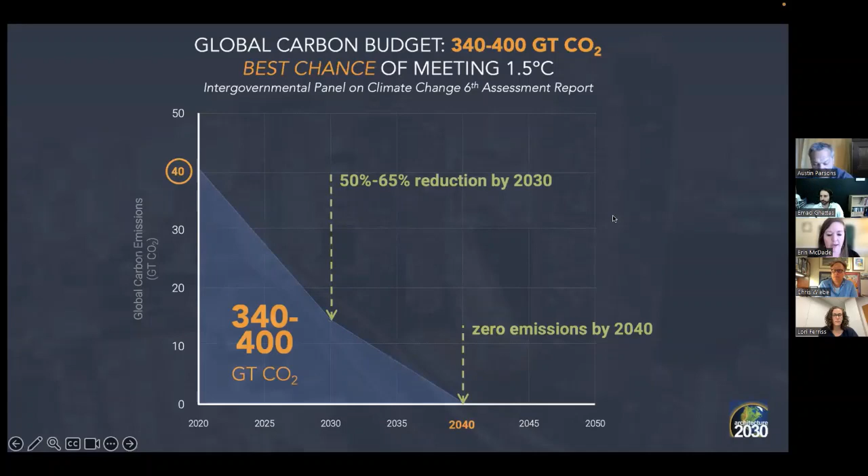And what that really looks like and what Architecture 2030 is calling for is a 50 to 65% reduction in all global emissions by 2030. So that includes the building sector, of course, but everything else, and then zeroing out by 2040. So partly I present all this because for me, when I'm working on C.A.R.E particularly, I'm always keeping in the back of my mind this 0 by 2040 year. So our 0 year is 2040 and everything I'm doing is working to align with that.

So diving a little bit into existing buildings specifically, there is a truism in the architecture and design world, and I'm assuming in the heritage world as well, that the greenest building is one that's already built. And if we do a quick look at what a typical new building's carbon footprint is, we can get a sense of why. So when we're constructing a building, there are a lot of emissions associated with that. There are all the emissions from the material extraction, from transporting these materials, and from actually building the building on site. We call that embodied carbon, and those emissions are in the atmosphere before the building is even occupied and operated, and they stay up there forever.

And so in this case, this average global new building has a decent amount of embodied carbon emissions. And again, once they're up there, they're always up there. And then starting on day one of a building's occupation, there are operational emissions, and those operational emissions start smaller and they build up cumulatively. And similarly, once they're up there, they're up there. Of course, with operational emissions, we can always retrofit and we can reduce those. With embodied carbon, no chance.

So if we're looking at this typical new building and we're drawing a line in the sand at our 0 year of 2040, we see that even though those operational carbon emissions are rising and cumulative in this example, we still have almost 60% of the total emissions pie for this building being embodied carbon. And when we reuse existing buildings, this green piece, this embodied carbon, is significantly reduced, which is what we'll talk about in more detail with the C.A.R.E tool.

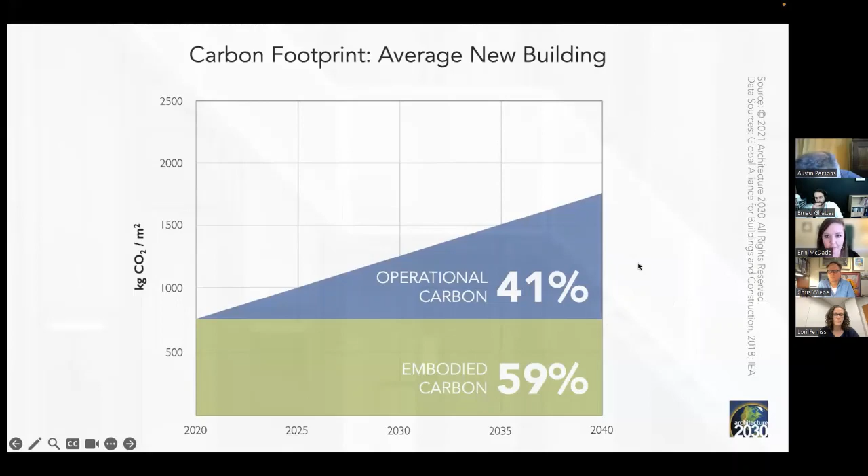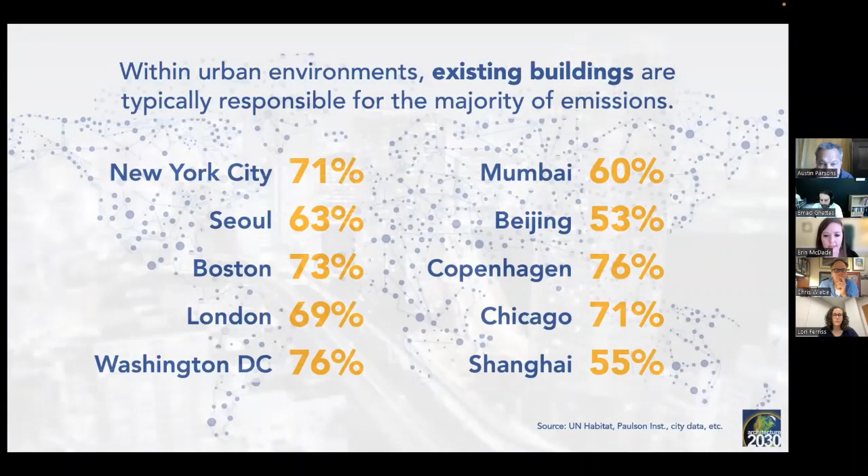But we can see because of this, that if we are able to save the majority of these green emissions, and we're able to curve down our operational emissions, then of course, reusing an existing building in this case is going to be smarter. But since we do have those blue emissions, those operational emissions that we haven't always gotten down to zero, what we see from a bigger picture context is that in urban environments, especially urban environments across the world with a significantly developed and older building stock, existing buildings represent the majority of total emissions for those entire cities. And you can see examples of that from a large variety of cities in different climate zones and regions. So obviously addressing existing buildings is pretty critical.

And if we scale that all the way up to a global perspective, what all of the estimates show us is that 2/3 of the buildings that will exist in 2040 will be buildings that exist today. So what that means is that most of the buildings that we see when we look around today are still going to be here in our 0 year. And if we have not touched those in terms of operational emissions reductions, they're still going to be emitting a significant amount of carbon, arguably the majority of the carbon in the world. And so we will never achieve climate targets if we don't reduce those existing building operational emissions.

So I would posit that instead of the greenest building being one that's already built, the greenest building is one that's been retrofitted. And that is really, at a high level, the genesis of the C.A.R.E tool.

And Chris already did a great job of a high level intro of the C.A.R.E team, but I just want to quickly do a little introduction, especially of our team member, Larry Strain, who can't be here today. He is the founding principal at Siegel Strain Architects. They're a firm out of the Bay Area in California, and they do a lot of reuse work.

And then, of course, my colleague, Lori Ferriss, who you will hear from later. She's the principal director of sustainability at Goody Clancy, which is out of Boston, and they do a lot of preservation, especially historic preservation work. So she will be a fantastic person to have this conversation with today.

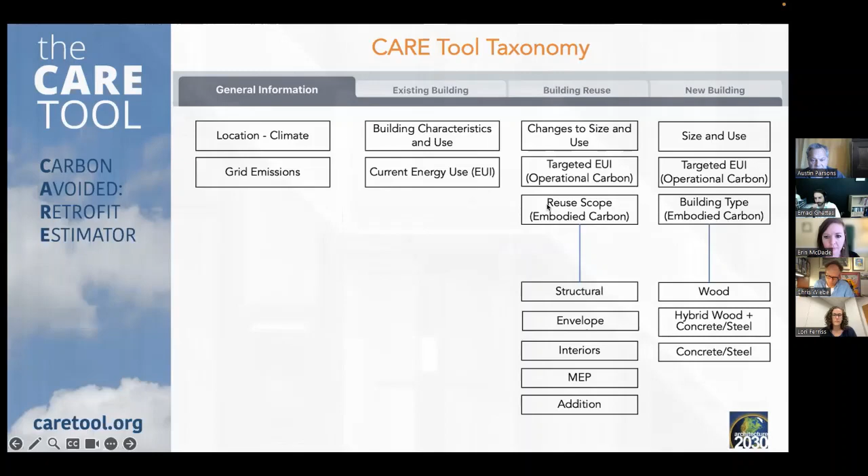And then similarly, you get to the new building tab, considerations about operational energy and emissions for if you replace this new building, and a couple even higher level questions about what that new building might look like from a structural perspective that affect embodied carbon. And I am not going to go through the details right this moment of all of what that looks like and how those inputs work, because we are going to get some case study examples of that from Lori.

And then as Chris said, I'm actually going to do a quick live demo so you can all get a sense of how easy and fast it is to get some results out of this. But so you're prepared for what the results should look like: once you have entered enough information on those 4 tabs, there are a couple of charts that will appear. There's also a data table that will show all the results.

And the first chart, this bar chart, is a snapshot in time of the total embodied and operational emissions for each of those 3 scenarios. The do nothing scenario, where you just leave that existing building and don't touch it. The reuse and addition scenario, or the new construction, the new replacement scenario.

And I think an important part of this, and at least for me when building the whole CARE tool, is that on the very first tab, we'll see it, you get to enter how many years you want the tool to look at for your building. And so I talked again about that 0 year 2040 and doing everything through that lens. So when I'm running through the CARE tool, I'm almost always at this point inputting 17 years there, because I want to look at what this is going to look like in 2040.

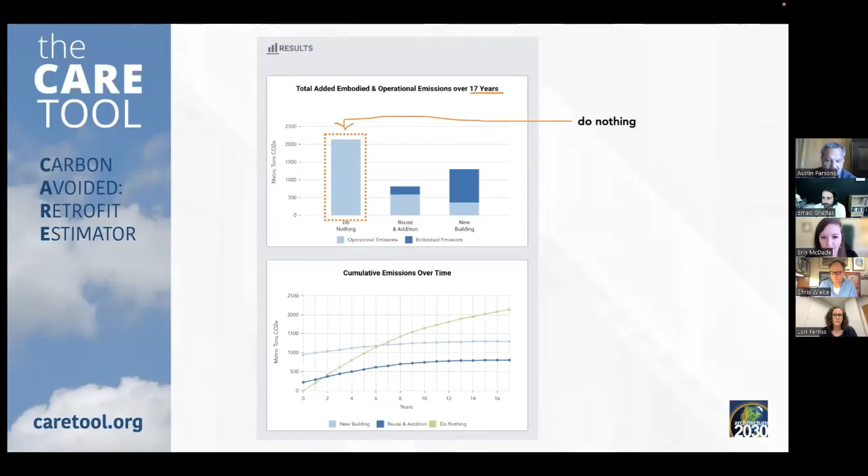But of course it's dynamic, and you can change that as you're entering information and see how more or less time impacts the distribution of these charts, which is pretty interesting. So like I said, the first bar on here is the do nothing bar, and we can see that this light blue is operational emissions, this dark blue is embodied emissions. If you don't touch the building, there are not going to be any additional embodied emissions. You've already built it. Those are already up in the atmosphere. And it'll continue to emit operational emissions for this 17-year period in this case.

And then we can see for the retrofitted building, the light blue, the operational emissions are dramatically less than the do nothing building. So I can already tell that for this example, the building achieved significant energy efficiency improvements, so operational emissions reductions, but that came at a bit of an embodied carbon cost, which you can see right here. Here's the embodied penalty, if you will, for achieving those emissions reductions, as well as any of the other retrofits and upgrades to the building that were necessary.

And then if we look at the new building, we see that it's even better in terms of its operational performance. It didn't quite get down to 0 operational emissions. But because the entire building needed to be replaced, we couldn't save any of the structure, any of the envelope, et cetera, as we presumably did here. The embodied carbon penalty, again, for achieving this dramatic reduction in operational emissions and any other additions and changes to the building that were required, is pretty high.

And so in this case, for this example, I would say, okay, seems pretty clear to me that for our 0 year, the reuse and addition is going to be our best bet. And in an ideal world, I would take this now to another tool that is more granular, and I'd say, okay, what can I do to even get this blue operational emissions box down even farther without adding too much to the embodied carbon box? And hopefully we'll get to the point where we have an optimized reuse project.

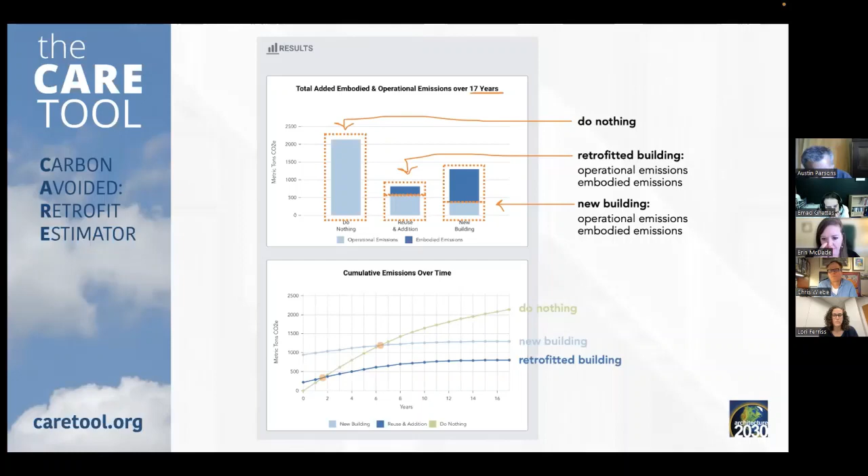And I'm almost ready to pass this now to Lori, so you can get some insights on what this looks like in real world projects. But I know one thing that's important. We have been able to present this tool to different groups outside of the United States. And currently the tool only has data in it, particularly climate data, although the embodied carbon data is regional too, and we'll talk a bit more about that later, from United States data sources.

That being said, there are a couple of short-term workarounds that I've developed so that you all do not need to wait to use the C.A.R.E tool right now. But then long-term, again, I want to be clear, we have plans to regionalize the tool as much as absolutely possible so that it actually has data from each of your individual countries.

So quickly, the first workaround is to use a comparable US zip code. So when the tool is analyzing climate data, essentially the zip code for the United States is going to tell it what the heating degree days and cooling degree days are. If you don't know what that is, it really doesn't matter too much, but that is what is going to determine all of the climate information. And so you want to determine a comparable zip code for your city.

And so for this one, I did a little bit of Googling. There's not a great data source for this, but I did a little bit of Googling yesterday, and it told me that Chicago, Illinois is a very comparable city in terms of climate to Toronto. And so I decided to do a C.A.R.E Toronto example here to show that. And so I put in a zip code for Chicago, Illinois. And so now the tool is going to have climate data that it thinks looks similar to Toronto, Ontario.

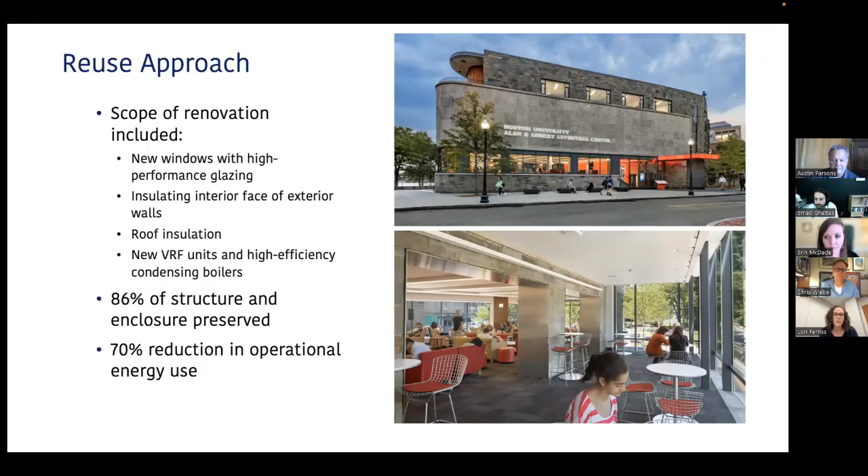Next slide. So because this was a comprehensive interior renovation, we were able to make quite a bit of energy performance improvements, which included high performance glazing and insulating the walls from the interior as well as the roof. Obviously, in addition to high performance systems, which almost completely brought the building over to electricity from fossil fuels. And through all of this renovation, we were able to reuse 86% of the existing structure and enclosure while reducing the energy use by about 70%.

Next slide. I'm going to walk through these quickly because Erin will show you how this works live. But essentially, as we go through these tabs, we first input that general information, where the building is. Then we define the existing building, how big it is, and its existing energy use, as well as what it's made of. Then we go through the building reuse tab, and this is the most extensive tab.

And I think all of you are familiar with what it takes to reuse a building and know that there are basically an infinite number of decisions you could make about how we reuse and preserve buildings. So that's why there's so much to input here. We want to know, was there an addition? So in this case, there's a small amount of addition.

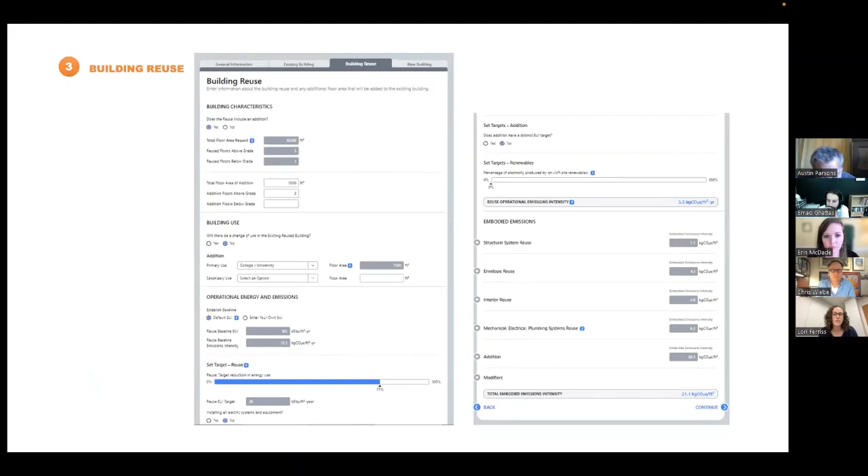We can here demonstrate that really significant energy improvement we were able to make, as well as define the scope of the intervention. So here, for example, we're reflecting there was relatively little structural work to the existing building. We did the complete interior renewal, new systems, as well as the addition.

Next slide. And lastly, we define the new construction. This is more straightforward. Essentially, how big is the building? In this case, we're showing a building kind of like apples to apples. So the same size building used for the same thing in contemporary steel concrete construction. And in this case, I've given the new building an energy performance boost of about 15%, just to kind of illustrate the difference.

And because I always get that question from people that do mostly new construction, well, wouldn't it have been more efficient to just make a new building? So let's say that it was. And what we see from the results on the left are those total emissions for the demonstrated time period. In this case, I showed 15 years, which would be through the year 2030. And we can see, of course, that the reuse and retrofit was the lowest carbon option of all three.

And on the right, we see, again, the crossing lines. So we see the small amount of embodied carbon from the renovation and the larger amount of embodied carbon from a replacement building. And we see that the renovation, again, pays off after only about 2 years, which is a really good carbon payback. And we also see, again, that if we look at the light blue and dark blue lines, they don't cross by the target year here, which means that for the whole duration of the study, the renovation is going to be the lower carbon solution compared to replacement, even when the replacement is more efficient.

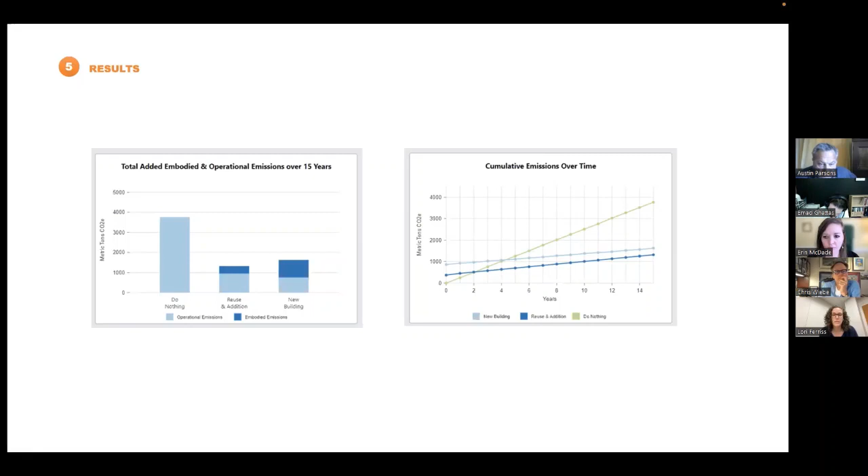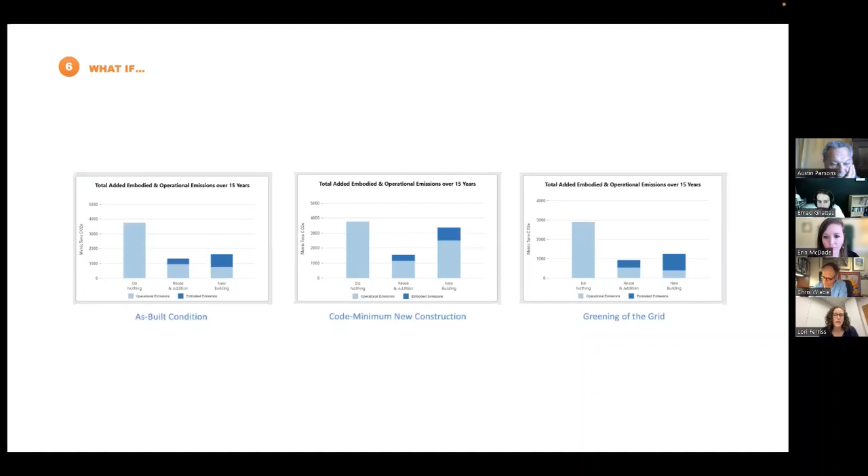And next slide. Okay, now I'm going to scale this up to a portfolio. So here we're looking at Agnes Scott College, which is outside of Atlanta, Georgia. It's a women's college founded in the late 1800s. And the entire campus is also part of a historic district. And one thing that's really interesting about the school's approach to campus management over time is that it has really been stewardship focused.

And while this was not really a codified approach, it was more of a philosophy that their historic infrastructure and buildings were so important to the identity of the school and really part of the student community and loyalty and their academic success. So over time, as they've grown, they've added new buildings, but they've also repurposed all of their existing and historic buildings. They've moved them around on the campus.

Oh yeah, you can keep going. Sorry, thanks, Erin.

They've moved them around to make space for new buildings, and they've adaptively reused, but they've really retained most of their historic buildings since their founding. Next slide. So we used the CARE tool manually. I had to build it out because the tool itself can only look building by building at this moment. But when we apply that building by building approach to the entire campus, the first thing we did was look retrospectively to understand, over the campus's whole history, how much carbon have they avoided through this stewardship approach.

And what we found is that they've avoided roughly 34,000 metric tons of carbon dioxide compared to an approach that replaced buildings at the renewal cycle rather than reusing them. And just to put that metric into context, they have about a 100-acre arboretum campus. And if they planted their entire campus with forest, that forest would have to grow for hundreds of years in order to sequester the amount of carbon dioxide avoided through reuse.

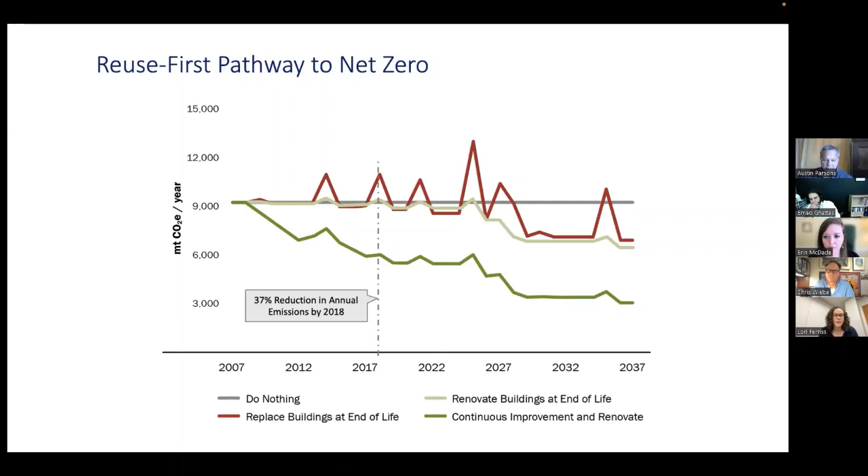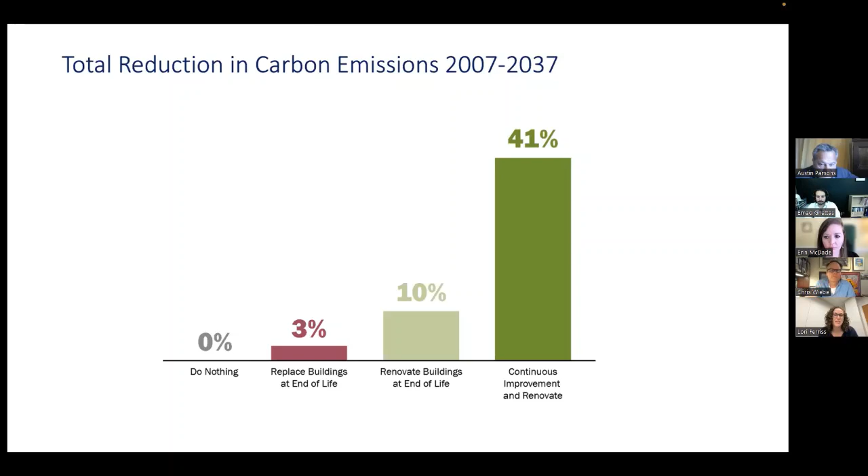So that's really kind of a huge win, and a huge indicator that it's an imperative to reuse and steward our existing buildings as we approach net zero. All right, back to Erin for the live demo.

Sorry, Erin, you'll have to unmute. Sorry, thank you.

All right, so what I was saying is that this is the point where we're gonna get into a little less formal talk here. So get ready to start asking questions, and I also welcome questions during the demo if anyone has questions specifically about the tool. Otherwise, I'm just going to run through it pretty quickly. So I'm going to show how easy it is. You just can go right down to caretool.org. And it is right here on the homepage.

Once you get there, there are a lot of supporting resources. We are working on populating out a lot of these pages, but in particular, just so you're aware, the About section has a lot of info. There's a very detailed user guide that Lori and her colleague wrote. And then we have, again, a very, very detailed data methodology section that Lori and her colleague led writing. So there's a lot of information and support there. So I've already covered this pretty well, so I'm going to walk through it.

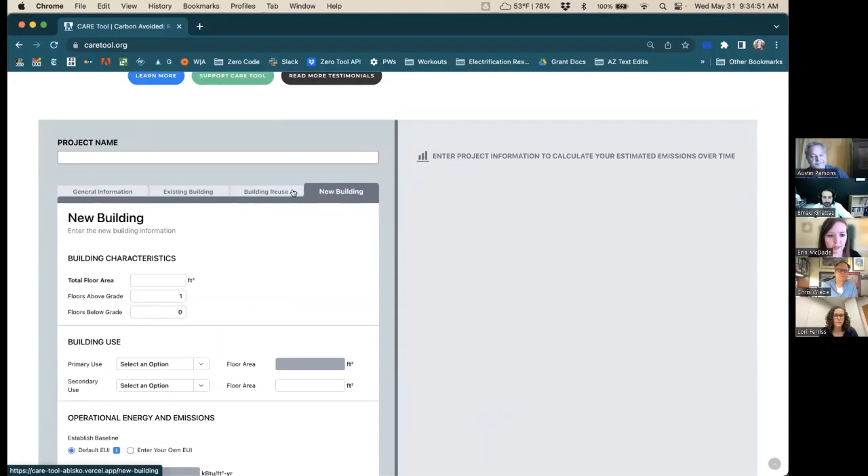Then you hit continue. It automatically takes you to the next tab. You can also click between tabs, and it'll retain all of your information. So for this existing building, I'm going to put in some floor area here, some information about the number of floors above and below grade, and the type of structure that this existing building has. We'll say it has a steel and concrete structure. Window to wall ratio, I'm just going to leave that alone. It defaults. If you care to get more detailed, feel free.

And then here's where we choose what the use types are for our existing building. So let's see, let's do a K through 12 school. That could be fun. And then we'll do a second use type. Okay, you can see here that that was enough information now already to get these charts populated. So they're not complete yet, but from this point forward, any additional information we add, the charts will automatically update. So what that means is that you can start playing with inputs and you can see live what the implications of those various inputs will be.

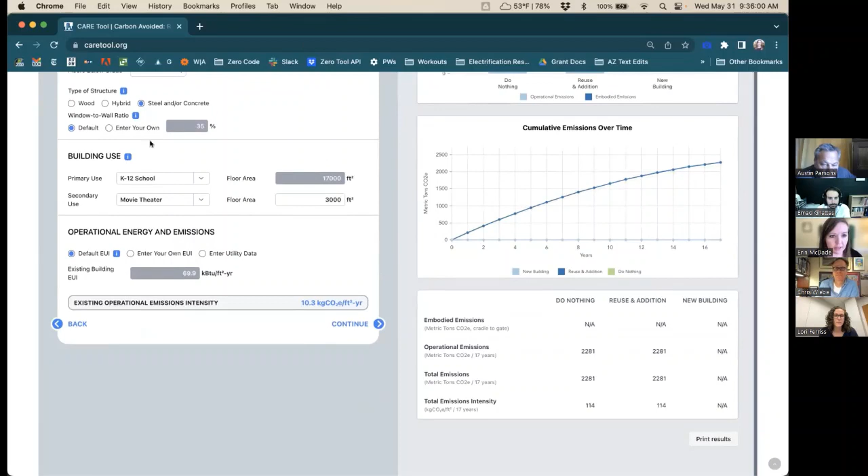I'm just going to choose a secondary use type for fun. Let's say there's a movie theater in our K through 12 school, because that sounds pretty awesome. Put in some floor area for that. And so all of that, just putting in the zip code and putting in that use type information, that was all the tool needed to tell me what it thinks my existing building energy use is and what it thinks my existing building operational emissions intensity is. All of this, again, you can customize, but for now I'm not going to. I'm just going to let it do its thing.

Then we get to the building reuse tab, which, as Lori said, is the one that asks by far the most detailed information. So we can say that the reuse does or does not include an addition here.

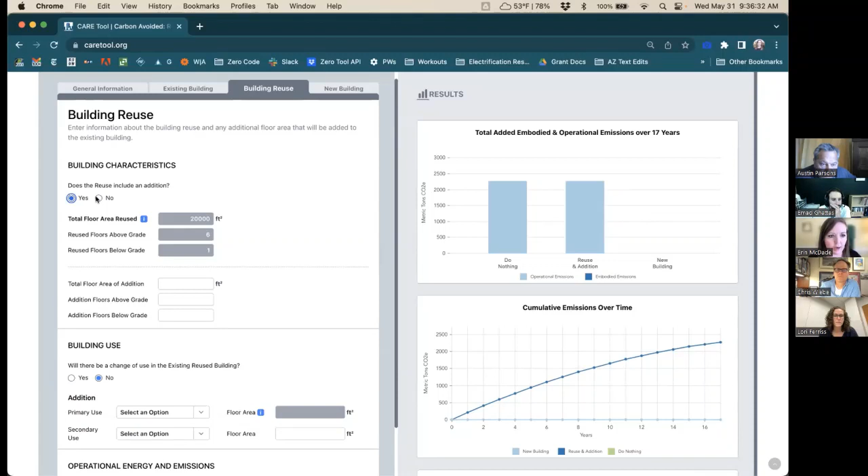If I say yes, it'll ask some more questions, but I'm going to stick with no in this case. This will also allow us to change the existing building use type at all. Again, if you say yes, it'll pop up those inputs and you can adjust them. And then here, it's already populated the energy and emissions. If I had made any changes up here, these would also have automatically changed.

And now it wants me to set my reuse energy reduction target. This is essentially how much energy efficiency am I aiming for in this project. We'll say I'm doing pretty decently. I want to get at least a 50% reduction in energy. Let's even go to 60.

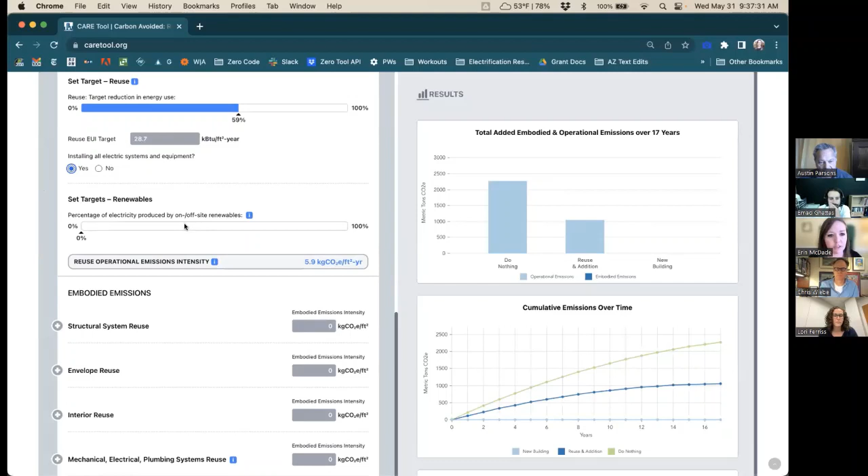And it asked me if I'm going to upgrade this building to all electric equipment. Essentially, am I going to electrify? I'm going to say yes. I don't want there to be fossil fuel equipment in my building. And are there going to be any on-site or off-site renewables that are going to make my building even cleaner, because we're using non-fossil fuel electricity? So again, I'll say about 30% of this demand can be met by renewable energy. So that's it. That's all you need for operational emissions for the reuse scenario.

And then for the embodied emissions for the reuse scenario, this is where you have to start to make some decisions about how big the impact is going to be. The first question is, how much of the structure am I going to reinforce or replace? If it's 0, then I just get to leave the structure fully as is. If it's 100%, it's going to take a ton of embodied carbon, because structures are typically very embodied carbon heavy. So I'm going to say we'll do maybe 40% reinforcement or replacement, which is actually a decent amount.

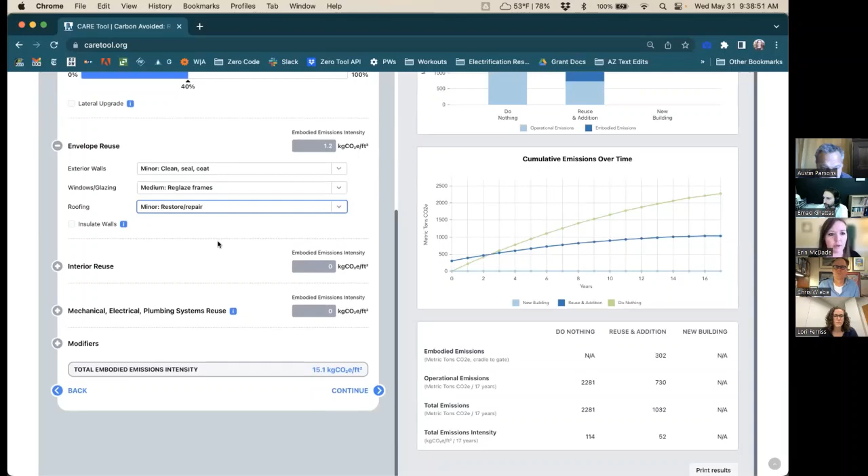Envelope reuse, a few questions about how you're going to impact the envelope. It is worth noting that for all of these sections where we think there's any potential to be confused, either on how to use the tool or how to choose the correct input, we have fairly detailed information i's that explain the purpose of this slider and how to make the best decision. So I'm going to say that we're doing a little bit of exterior wall work. We're going to reglaze, not fully replace our windows. We're going to do just some restoration on the roof. Don't need to insulate.

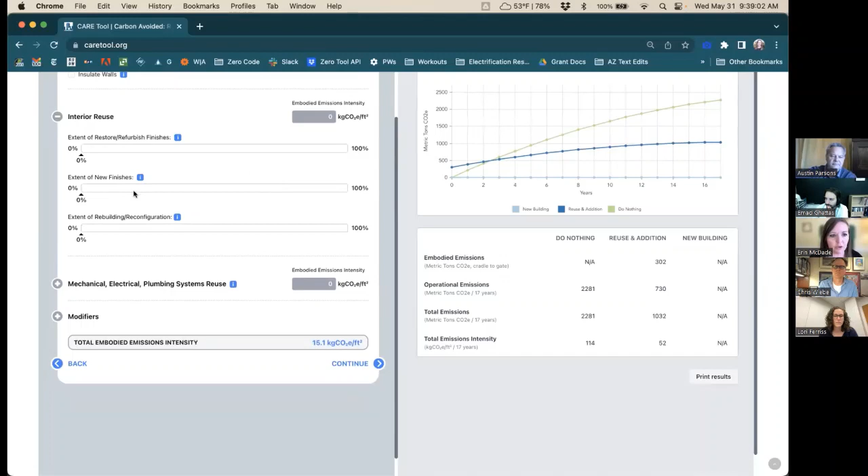Interior reuse, very similar set of sliders. How much is going to be restored? How much is going to be completely new? And how much is going to be rebuilt or reconfigured? Again, there's a little bit of information to help make the right decisions on this. I'm just going to choose some random things for the purposes here. And then MEP, I am going to say that this is a major upgrade, because I said that this building is going to be electrified, and that will typically be a major replacement.

And then there's a set of modifiers. You'll see a similar thing on the new buildings tab that can make some minor but potentially important changes to some of the above inputs. So if you're using low embodied concrete, responsibly sourced timber, low embodied emissions envelope, and then high performance MEP. I'll just choose a couple of those here. And so with that, we have our picture of our reuse and addition. We can see we're clearly already doing better than the new construction, than the do nothing. That doesn't surprise me, since I chose a significant energy efficiency improvement.

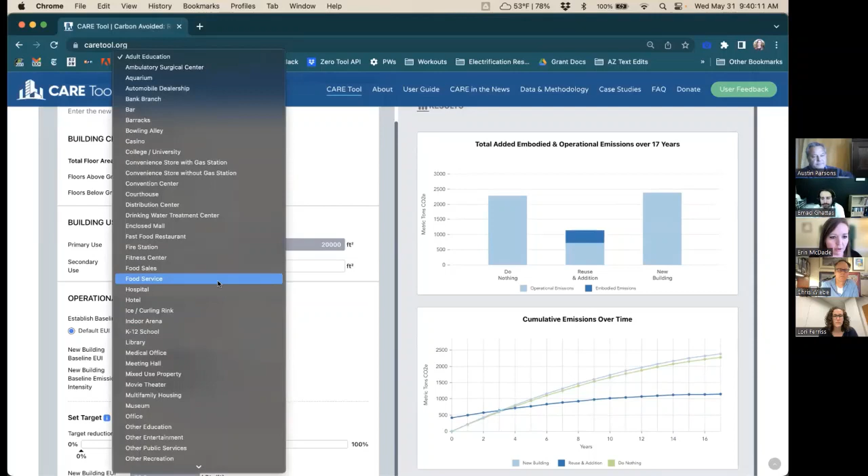And then we'll quickly go to the new building scenario. I'm gonna, like Lori showed in her example, keep this apples to apples. So I'm gonna keep the same use types here. You certainly don't need to do that, though. It is still a great comparison, even if the use types change. I usually change them for demos. We'll do 3,000 here again. Again, it's already populated the energy and emissions for us.

We will say how much energy efficiency we want for this one for new construction. The assumption is we should be able to get a decent amount more energy efficiency. Again, electrify. Again, the questions about renewables, how much generation or procurement are we going to get? We can now see it starting to populate there. And then for new construction, for embodied emissions, it's significantly easier than for the reuse.

We can talk about the details of that, but primarily structure is what drives the embodied emissions by and large for new construction. So in this case, we just are going to choose our structure. You can see that that blue new building line popped up dramatically when I chose that, a significant amount of emissions there. And then those similar modifiers. And with that, you have all of the outputs that you could expect.

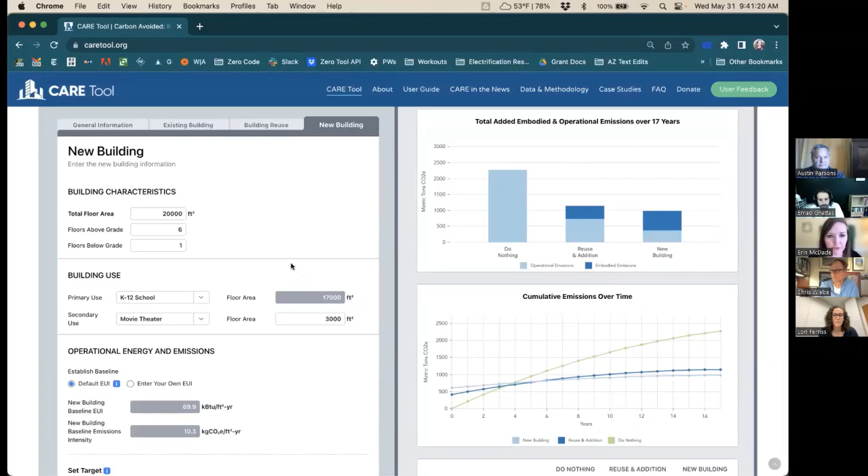And so now at this point, you can take a pause and we can answer questions, or then, like I said, you start going back, flipping between the tabs and making some changes to see what the impacts of different outputs and different decision-making might be. So whether they're at a really high level or something like, okay, what if for my new building I'm actually able to achieve an 82% energy efficiency, pretty aggressive there, but hypothetical, and you can start to see what the updates will look like.

And I'm going to pause there because I think it's a good time to dive into questions, and happy to do any more through this lens, but let's also talk big picture here. Thanks so much, Erin and Lori. That's great. I'll ask you a few questions.

I think there's some really interesting insights there, and I think one of the key takeaways for heritage conservation people will be that it assumes that the do nothing scenario with historic buildings is not an option. That in this scenario, to actually get solid results, there needs to be retrofitting. And I think that's one of the things that sort of sits in the background of a lot of heritage conservation discussions, that we're already virtuous, but that idea that heritage places need to step up and do the retrofit work as well is embedded in this tool, and it shows the impact that can have.

A couple of quick questions, and I'll flip it over to Emad and Austin to dive in with some of what they're seeing from the questions too, and some of their insights generally. There's a number of questions coming in about energy sources, and how do you identify energy use in a particular area? How did you go about doing that? I'm thinking about some of the challenges around updating this tool and calibrating it to the Canadian context and what that's going to take. I don't know whether you wanted to dive in, both of you, on that and on the climatic conditions and how that gets embedded in there as well.

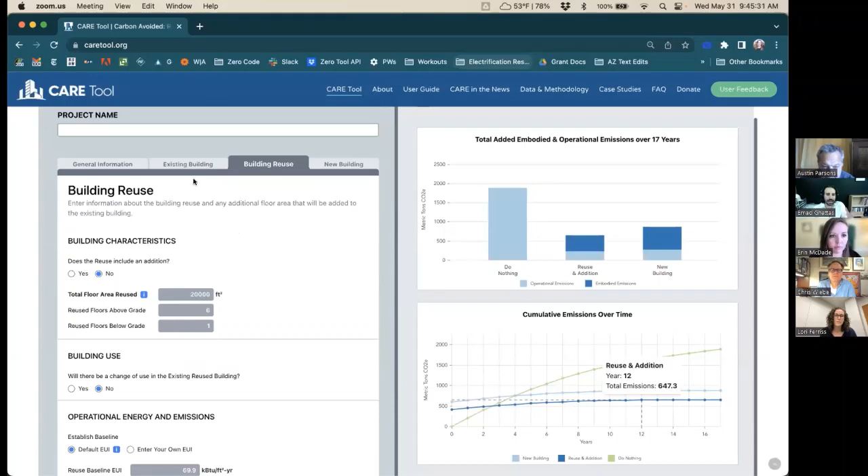I mean, it's kind of tough to sometimes ask questions for that, but how does that relate to, for example, the embodied data that you have in there that relates to the energy grid or the electricity grid? I'm not a mechanical engineer who knows all that stuff, and I'm not very much a data person. So I'm just wondering how do I justify to a client that these were the right numbers to use so that they can see that there was credibility in there.

Yeah, I think that's a great question. I can answer it from an operational perspective, and I might let Lori take it from an embodied carbon perspective. But the short answer is yes. When you're entering the operational energy and emissions info, when I did the demo, I just did the default where it does the connection to the Zero Tool. In fact, there's more information about that here. It pulls from that and auto-generates it, but you can enter your own.

So if you have an energy model, or if you're the architect or engineer, or someone has an energy model with an energy use intensity, you can enter that. Or like you said, if it's an existing building, there's going to be utility data somewhere for that building. And so you can enter the utility data, add as many energy sources and types as you want, including renewable sources, and get a very precise and accurate energy use intensity.

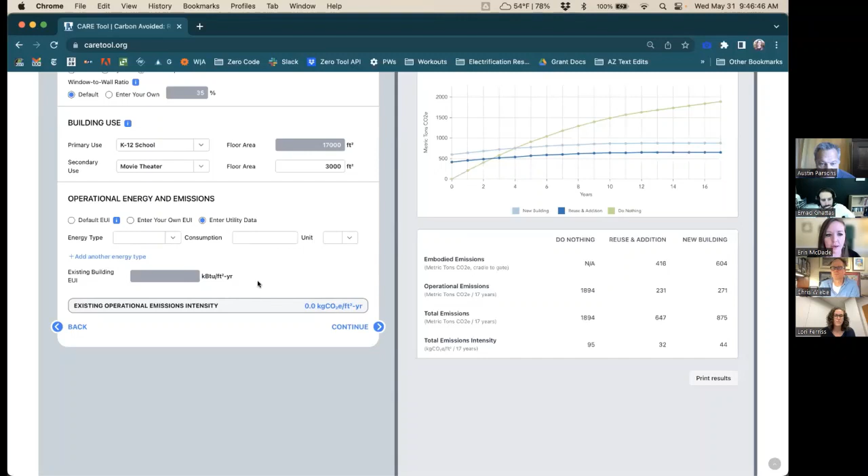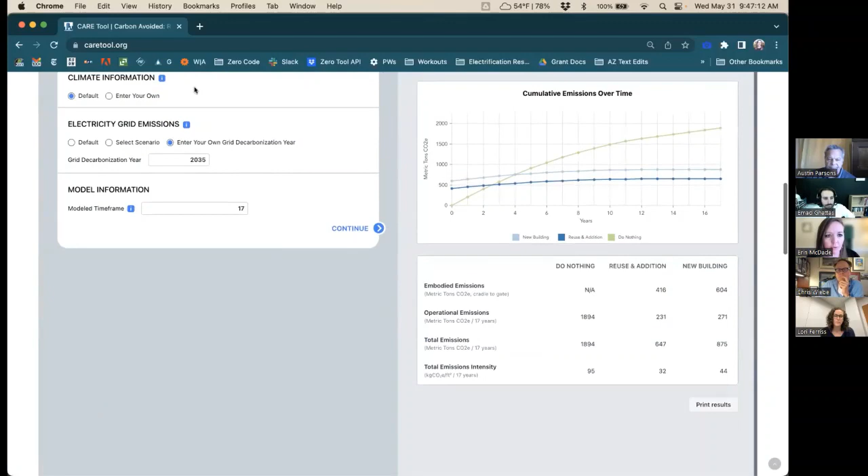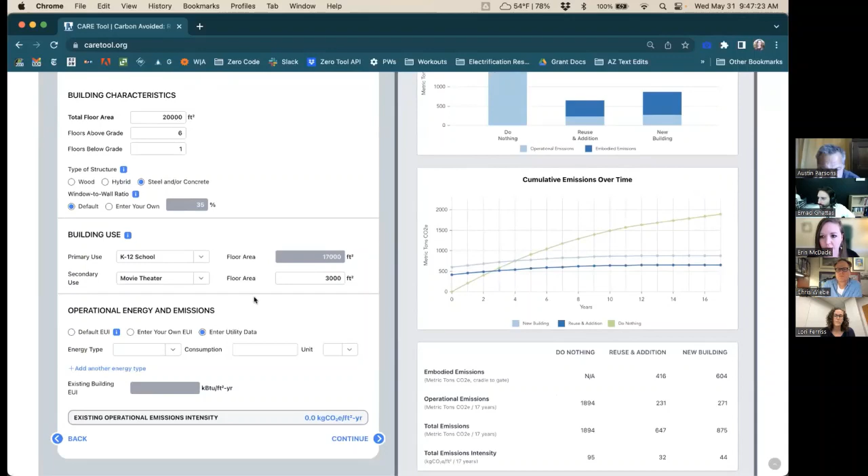And the emissions assumptions are based on the electricity grid, obviously. Currently the tool looks at electricity grids throughout the US at a semi-granular level. If we connected it to Canada, we would have to find comparable electricity grid information. But again, you can kind of work on manually customizing that. And then the emissions from fossil fuels have standard emissions factors that are just the nature of the fossil fuel, so those don't change from region to region.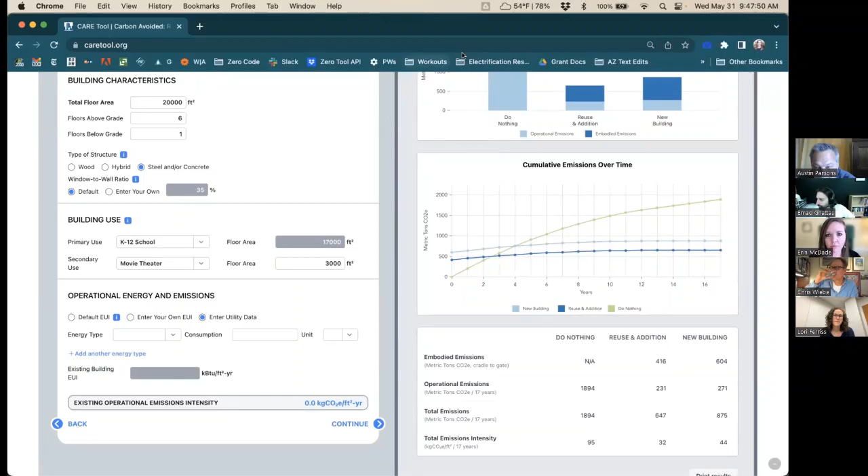One thing I did want to say is when I look at this C.A.R.E tool, as you said, it analyzes a specific type of problem, and it's looking at the embodied carbon cost of making existing buildings energy efficient. And it's not an LCA tool, as you said. And it's interesting that you don't deal with the demolition, where you take out the materials, and you don't deal with storage at all, since you're looking at the existing building from a retaining carbon point of view. That's really interesting, given that when we deal with these carbon cycles, we're always trying to think about storage and what to do with that carbon.

But it's also really a question about retrofitting or replacing. And as I say, it's a great gateway tool. I looked at it at a very high grain. And if I didn't know what an EUI was, which is energy use intensity, the amount of energy per unit area per unit time, or if I didn't know what a degree day was, or what decarbonization was. And I saw this in the chat: those of us in Nova Scotia are still burning coal to generate electricity, and hopefully we'll decarbonize by 2030, but we'll see if that happens.

So there are all these interesting ideas and comments which are very apropos to operating carbon and embodied carbon. So it's a very good way to introduce the subject. Also, you bring out really interesting assumptions. Your results are based on a level of energy efficiency and a timeline. And I can get any result I want depending on what level of energy efficiency or timeline I pick. The farther I take the timeline out, the more important operating energy is; the closer it is, the more important embodied carbon is.